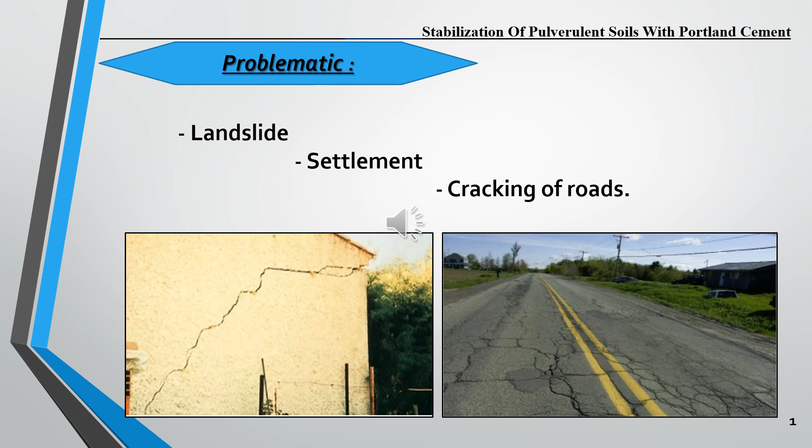Many studies show that cement treatment can significantly modify the physical and mechanical properties of pulverulent soils, such as increasing shear strength and modifying compaction properties.

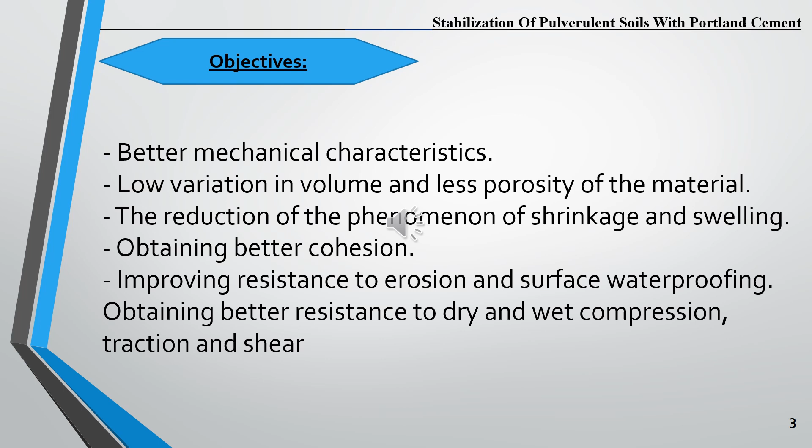During the preparation of this work, we tried to take into consideration the choice of treatment used, the influence of the treatment used on the soil studied, and the ideal rate to improve the geotechnical characteristics of the sand.

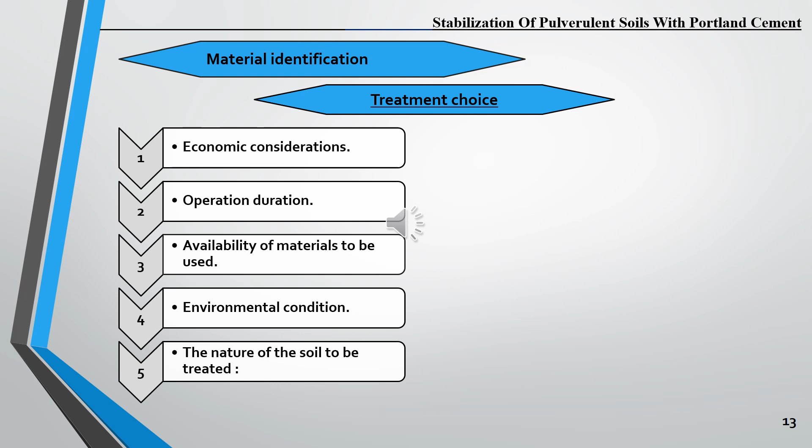In this work, we are interested in the stabilization of the sand of Oued Zhor Collo Skikda by treatment with cement, and this technique opens the way to quite interesting new applications.

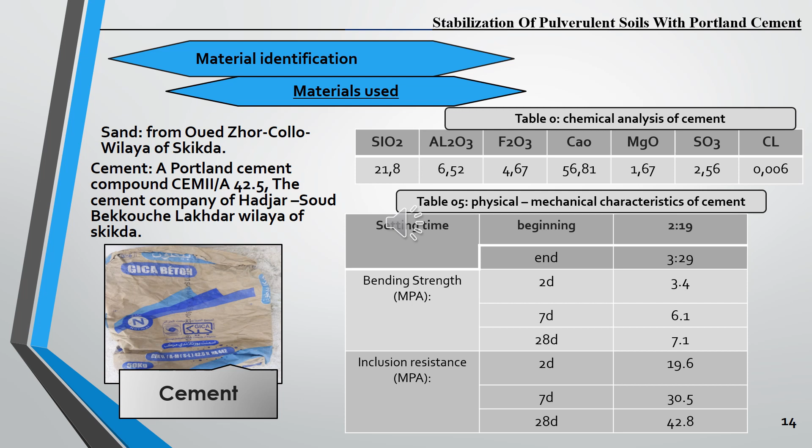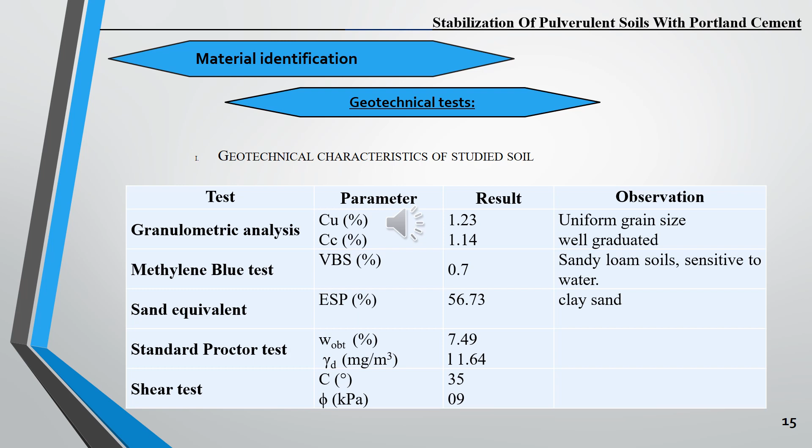The first experimental part was devoted to sand identification tests. The second experimental part aims to study the stabilization effect of Oued Zhor sand by adding different rates of cement: 2, 4, 6, 10, and 12%. The conclusions drawn by the study are the following.

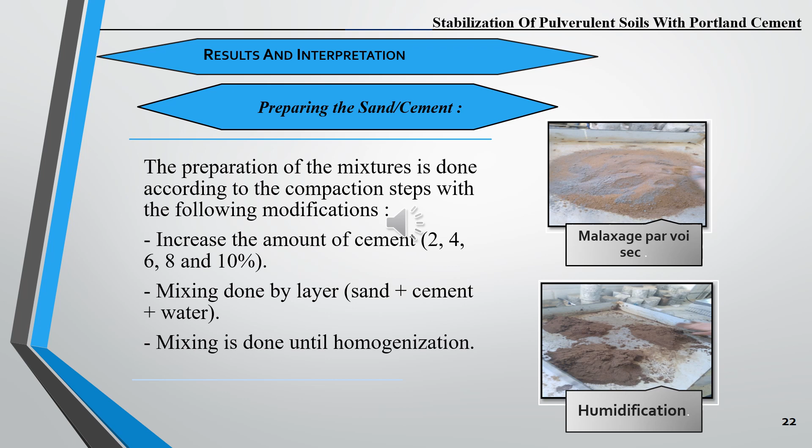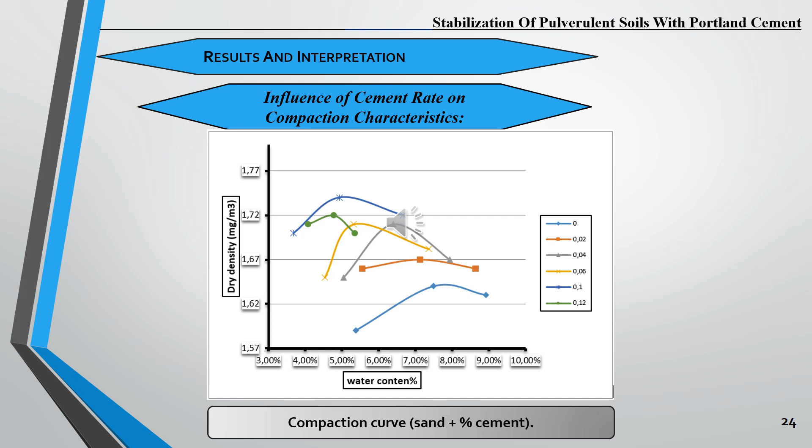The increase in the rate of cement influences its compaction characteristics: an increase in the maximum dry density and a reduction of the optimum water content. One of the consequences of this observation is the improvement of the compactness of the soil on which the work will be carried out.

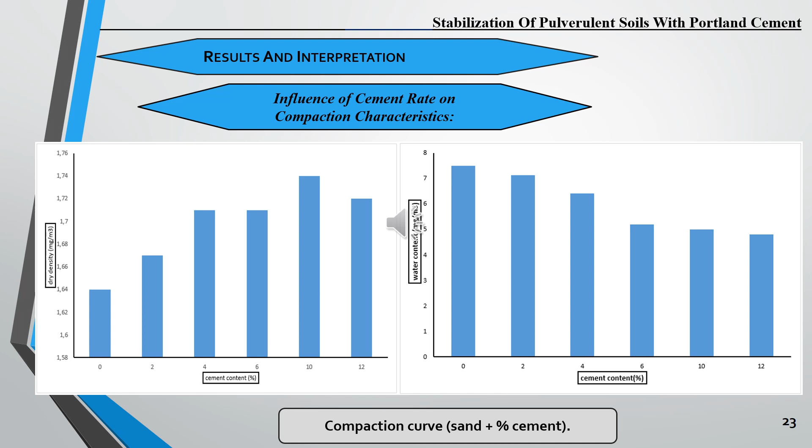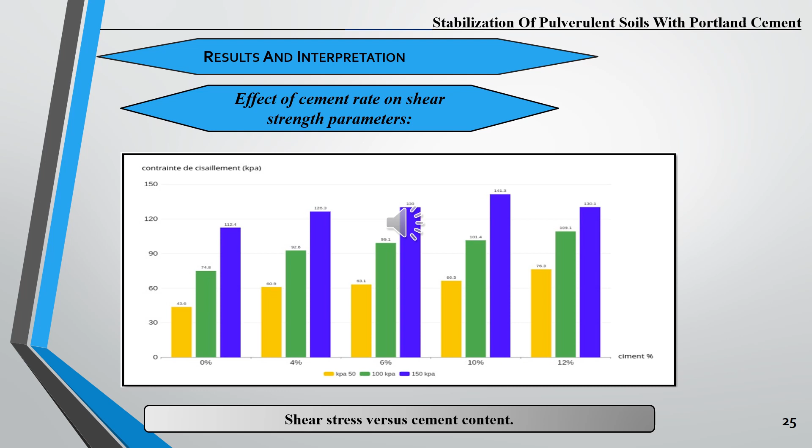Secondly, the direct shear tests on the treated sand have clearly shown an increase in the shear stress at break and in the cohesion relative to the untreated sand. Better still, the envelope decreases in slope when the rate of cement is higher. It is a reduction in the angle of internal friction.

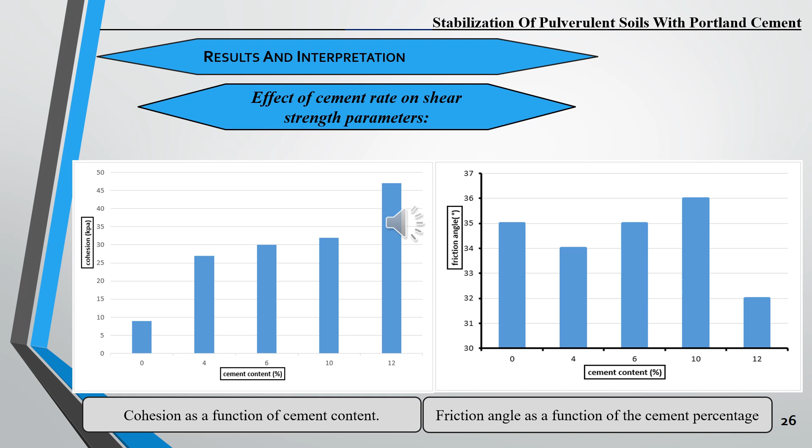In this context, we have managed throughout a series of tests on cement-treated sand samples to improve their physical and mechanical characteristics at 10% of cement. Finally, we can say that stabilization by adding cement is recommended to improve soil stabilization in our case study.